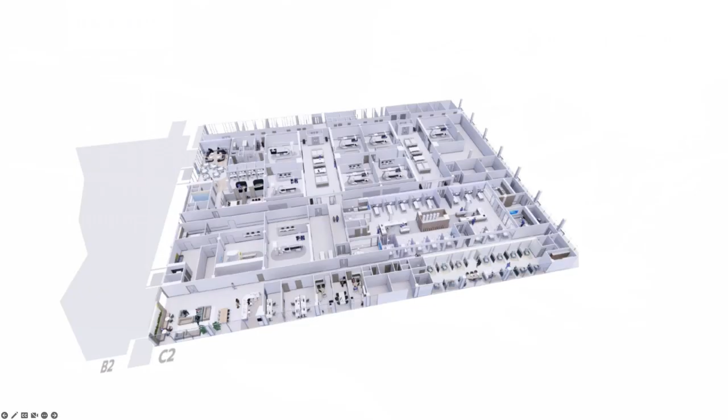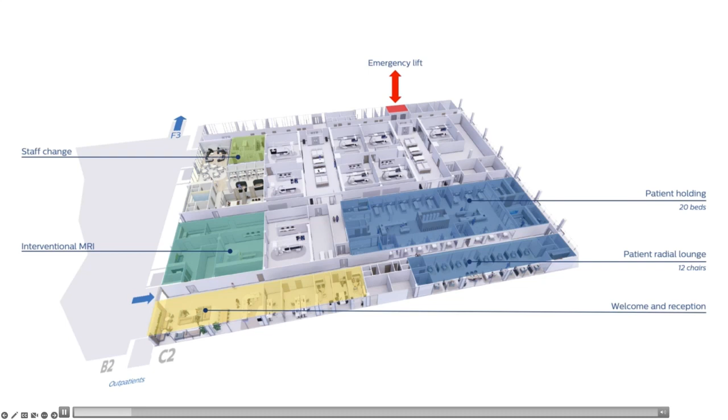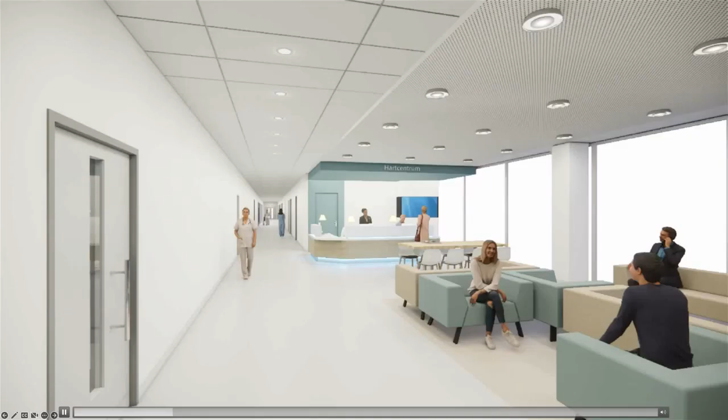I don't hear the sound. Okay, sorry for that. No sound, correct? Last time, try this. No sound. We'll do without sound.

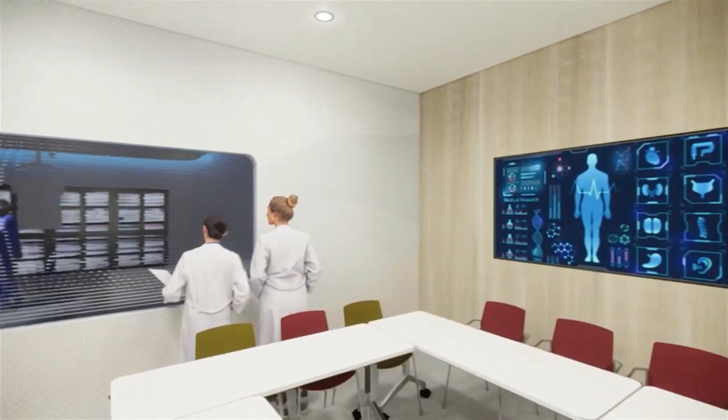Okay, back to Brenda. So I hope you all have good imaginations, a little bit of technical difficulty with the sound, but amazing video, amazing project. When I first saw this project, I was so intrigued by the design decisions, my brain kept generating question after question. So for those of you in the audience who might be experiencing the same thing, feel free to type your questions into the Q&A and we'll be taking a look at those throughout the process.

But to start, I've got a question. I'm super curious about the process that was used on the project. Designing for healthcare spaces is incredibly complex in itself, and then you're adding on top of that the complexity of bringing together what was once two very distinct organizations, with what I'm assuming are very different work cultures and models of care. So how in the world did you actually do this? And during the peak of the pandemic, what process did you use to engage? How did you bring alignment amongst the group in terms of design direction?

Super curious about this. Yeah, happy to answer this question, Brenda. And to start with the last remark about the pandemic, indeed, this project started at let's say the heart of the pandemic, actually. That's not over, but at that moment was really at the top. And we were not able to visit the hospitals, neither the team there in the hospital.

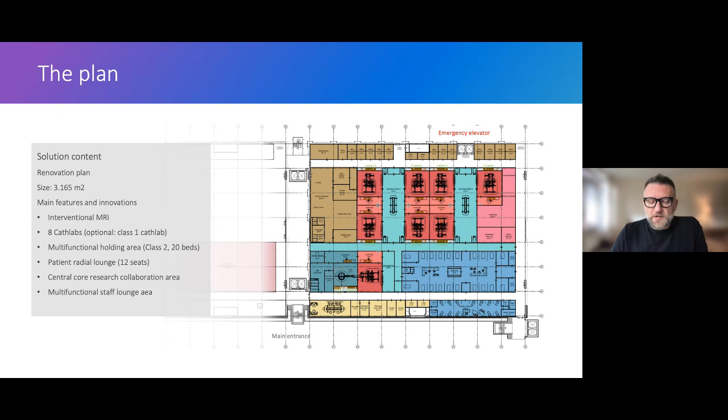And finally, since this is an academic research center, we had a multifunctional MRI, interventional MRI area that we'll also cover in more detail later.

But so we can look at the flows now a little bit. Basically, when we are designing healthcare spaces, we have to pay special attention to internal circulation, or the flows as we refer to it. We have to ensure that we separate and optimize movement through the department by separating inpatient, outpatient, emergency, staff flows, as well as material logistics.

You know, how do you bring all the materials into it? You do not want to see that. It should be behind the scenes. So the idea is to enable the flows to coexist with minimum disruption and crossover. For example, a patient going through a minimally invasive same-day procedure should not cross paths with a critically ill patient brought in from the emergency.

So hopefully that gives you a little bit of a background and idea of the challenges from a planning perspective. Let's say, Serge, if you're an architect, if you see this planning, this stacking and blocking, as they typically call it, and this flow, what is the specific challenge here? Because you can put everything in place when you still don't have a flow. How do you manage that actually as an architect?

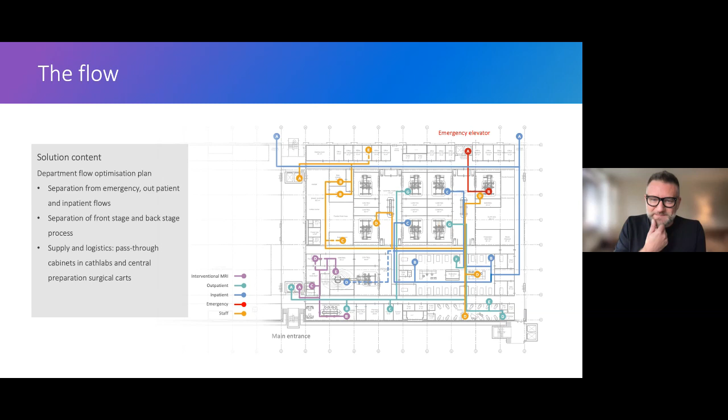Yeah, I think in addition to that, Serge - I think the request was also to create this North Star, more a concept. So the most important thing is that you can go a little bit faster, because actually you try to create a memory of the future, right? Because these people are very busy - they don't have a picture of how their future environment could look like. And that's why we helped them create that based on their own ideas.

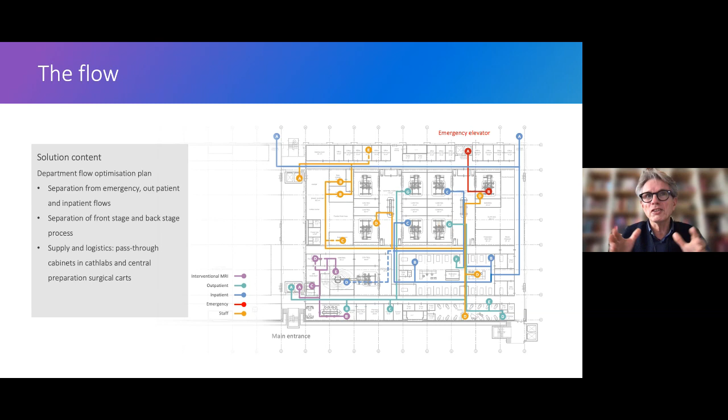Yeah, and now it's in their mind. So when they see drawings, they see the next steps, because a lot still needs to be done - this is only the first step in the project. They will recognize, okay, this concept needs to be developed further together. So the 8 weeks doesn't mean they can start to build - let me be clear about that. But it's a very clear vision, and it fits into the restrictions that they had in this building. So technically it's buildable, but there's still a lot of things that need to be done.

Thanks for that, Jos.

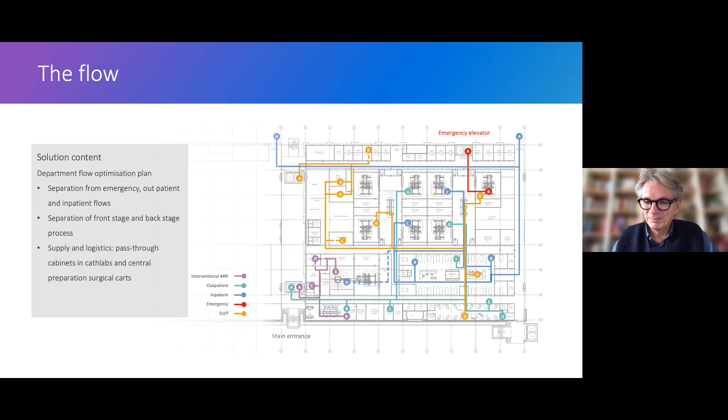There was a space that I saw in the video that I have some questions about. I noticed there was a scene where a physician was reclining in a chair, resting. And what made me start to think about is how we're experiencing this global crisis related to healthcare staffing shortages, compounded by the fatigue they've been experiencing with COVID-19.

And so there's been a lot of talk about patient-centric design, and I've started to hear and see this movement refocusing to the staff experience. So when I saw this space, I wanted to know what this is, and how it fits into the context of staff experience - whether it be providing spaces for respite and recharge, looking at the overall design to unburden the staff and optimize their work, and leveraging the space as an opportunity to attract and retain employees.

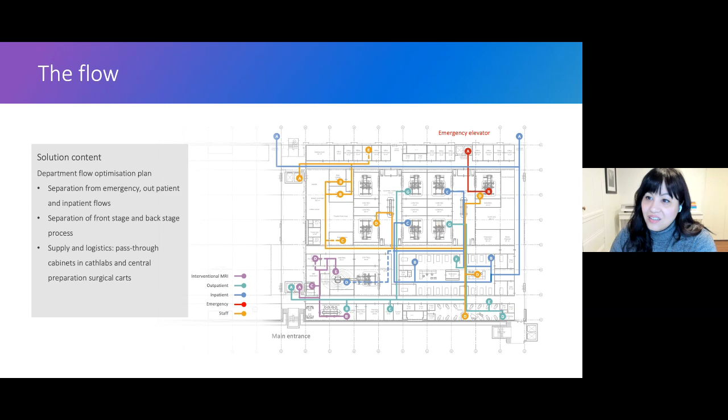You probably mean the power nap room that you're referring to, the one you can see on the screen now. I think this is quite an explicit feature - of course, they didn't ask for the power nap room, that's what we made out of their need. But they really wanted, in between procedures, to take a quick nap, not more than 20 minutes, to re-energize for the next procedure, in their direct environment.

Because we all know we are facing quite some challenges when it comes to staffing these environments - you need highly specialized people, and there are few of them. So how do you create an environment where at least people can take care of themselves a little bit? That's where this idea came from. And we learned that these ideas only work if they are directly accessible from the workflow. If you place them outside the workflow, staff need to step out of the department and change their gear, which is less effective. So that's why we came up with this idea, the power nap room.

In this environment, they can even make a phone call with their family in between, just to re-energize a little bit. And that's in general what we looked at regarding the well-being of staff, because they were merging two teams, very capable teams from two university hospitals. One of their concerns was that people might go elsewhere since they need to change anyway, so there are many opportunities for them in this area.

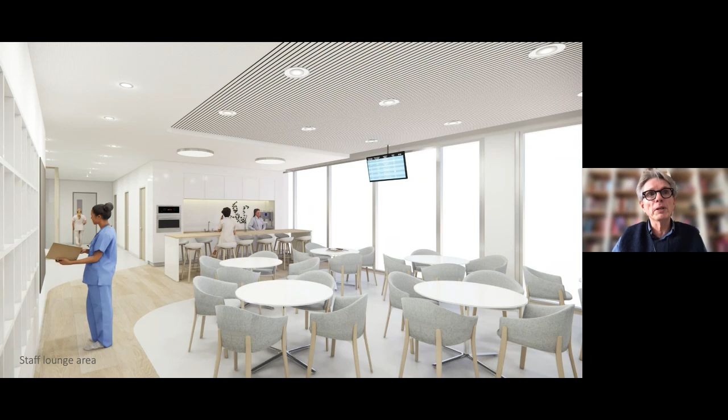That's already so much more freedom to move, socialize, collaborate, and evaluate. That's what we build upon — creating these spaces very nearby, briefing sessions in between procedures, sitting together before they go to the OR area, with screens available everywhere to share data even before the procedures. There are even screens where they can see procedures running, and if support is needed, they are directly connected.

There's also what we call reporting, and there's a lot of reporting that needs to be done. We have comfortable environments where the acoustics are under control, so they can sit, review the data, and do their reporting out in the same areas.

So the other one is — Serge, your focus is very much on this OR environment. Please, can you elaborate a little bit on this and the collaboration here in this area?

Serge, hello. Unmute.

I mentioned earlier these collaboration cores that we have placed. What Jos just showed is in the staff area, the staff lounge area, which is still connected to the main interventional areas. But at the same time, we felt that being an academic hospital, a research hospital, really has to enable collaboration and teaching at much higher levels.

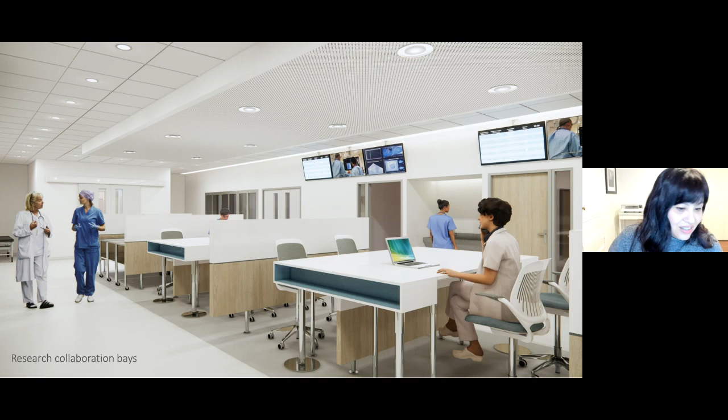It kind of leads me into another question. I'm based in the United States, and we're under incredible pressure to help reduce the cost of healthcare. As architects and designers, we do play a role in that. What we design influences the cost of healthcare because there are capital costs associated with the project. There are a lot of different design strategies you can take. You can focus on designing the space to reduce cost of construction, being efficient in how we develop these projects, designs that support efficient workflows, life cycle costs, the list goes on and on. But on top of that, healthcare space is complicated. We must deliver these elevated experiences for the patients, and we have to think about the staff as well. They're healthcare spaces, so we have to support quality and provide safe care as well. So not sure if you're experiencing the same level of pressure in the Netherlands, but if you are, how did you respond to these challenges in your design, in particular some of the cost challenges?

Yeah, Brenda, actually we do in the Netherlands as well. Maybe the scales are different, and the infrastructures are different. They always say in the Netherlands, from every place you can take your bike to a hospital. Yeah, so that's not completely true. Somebody told me that, but it means we have many hospitals in a smaller country. But we also have cost pressures now, and we learned also during the pandemic we need to do things differently. The point is, what we start to learn more and more is that the whole organization of the design of healthcare needs to be different, because if good ideas come too late...

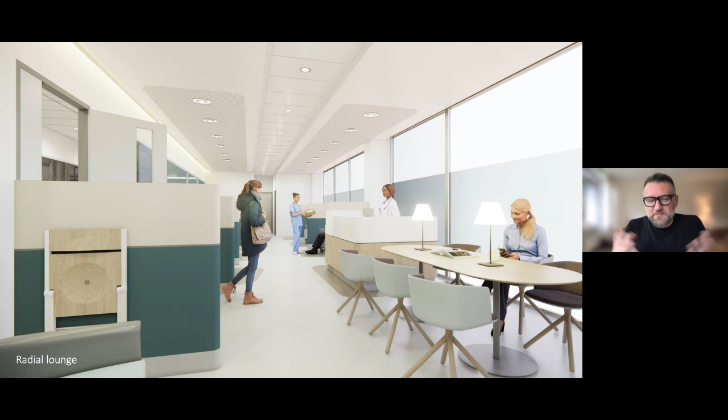I don't know how many of you have had an experience of a procedure like this or similar, but holding areas, these clinical areas, are not always the most comfortable, and people want to get out as soon as possible. This enables you to do a lot of preparation and second-stage recovery in a much more comfortable, home-like environment. Also very important, this is a space in the radial lounge where you can be accompanied by your family. So it's basically a win-win from every angle.

Yeah, it looks like it provides a lot of opportunities to elevate the experience, and it's reminding me of things I'm starting to see in the emergency department — this phrase of keeping your vertical patients vertical, getting them through the process faster. Similarly here, if these patients don't need to be lying down, why are we making them lie down? I love that you're responding to those needs. From a cost perspective, this also takes up less space than a stretcher, and it lets you create an environment people actually want to be in, not distracted by medical equipment and people going through large corridors. I love this design move, responding to the various needs and acuity levels and patient types in the space.

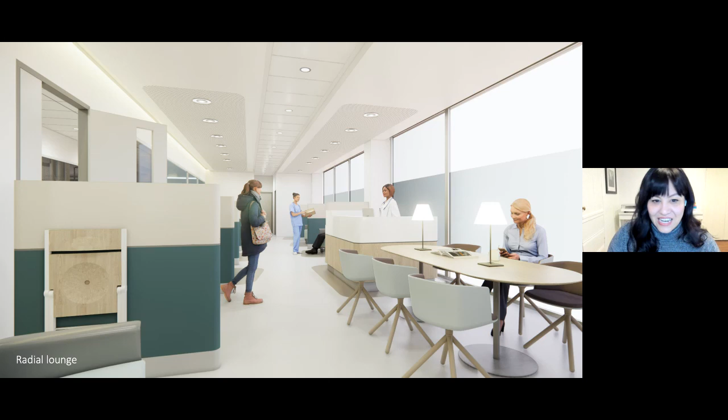In terms of the patients that do need to be horizontal, lying down in a stretcher, how was that designed, and what thoughts went into that?

Sorry, can you repeat the question? I missed that a little bit. Oh, for what we're showing right here, the multifunctional holding area — I just want to know a little bit more about the design of the space for patients who need to be in a stretcher, and what thoughts went behind the design of this.